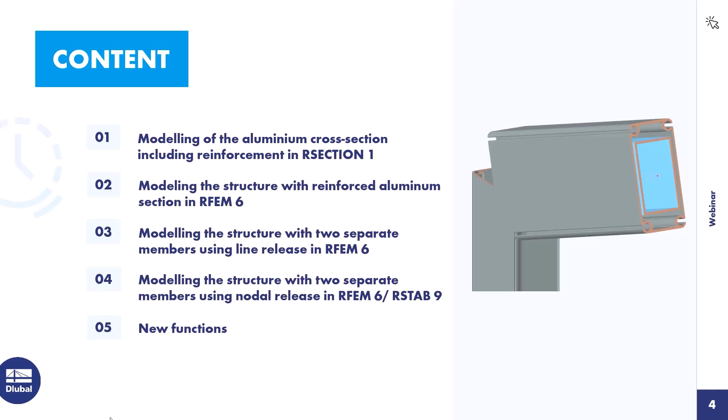This brings me to the first point, the modeling of the aluminum cross-section, including reinforcements, in RSECTION.

The cross-section geometry is available in DXF format, so I can use the import function. The creation of cross-sections based on DXF files was the subject of a previous RSECTION webinar. You can find this webinar on our website or on YouTube. There's also a knowledge base article on this topic on our website.

I start the import process via File, Import, DXF. Then I choose the corresponding DXF file and click on Open. In the import dialog, I select the option Create DXF template for further editing, and then click on OK. Now the lines of the DXF file will be created in RSECTION.

I first create the part using the function Select Boundary. Here I have to define the material. I want to use the material that's already chosen in this box. Then I click on OK, and then I click on the corresponding line. The part is now created.

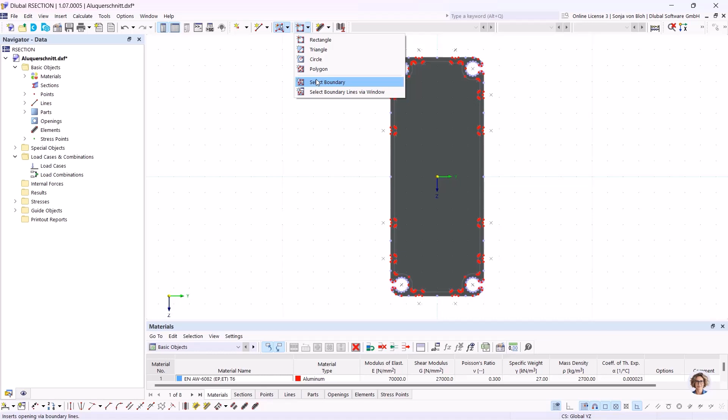Now I have to create the opening. For this, I also select the function available for openings, Select Boundary, and then click on the corresponding line.

I then deactivate the display of the parts and openings to get a better overview. I then create the elements necessary for the classification and calculation of the effective cross-section.

To do this, I only model a quarter of the cross-section, and then create the other parts by mirroring. To do this, I use the Set Centerlines function, which I find here in this part.

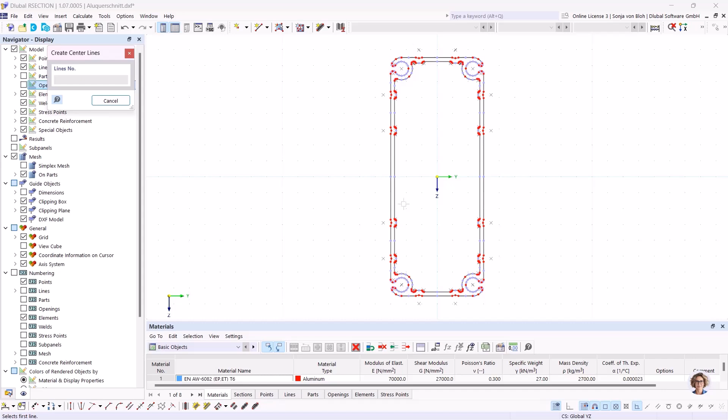All I have to do is click on the two parallel lines, and the center line is then generated automatically. First I create the center lines for the flange, then for the arc, and then for the web.

The center lines then need to be extended. For this, I use the function Extend Graphically. Clicking on the left side of the line to be extended extends it to the left; otherwise it extends to the right until it intersects with the next line. I will extend this line to the left, and I also want to extend the center line of the web on both sides.

Since I only want to model a quarter of the cross-section, I trim the center lines accordingly. To do this, I use a function called To Location, which makes it possible to extend or shorten a line to a specific location.

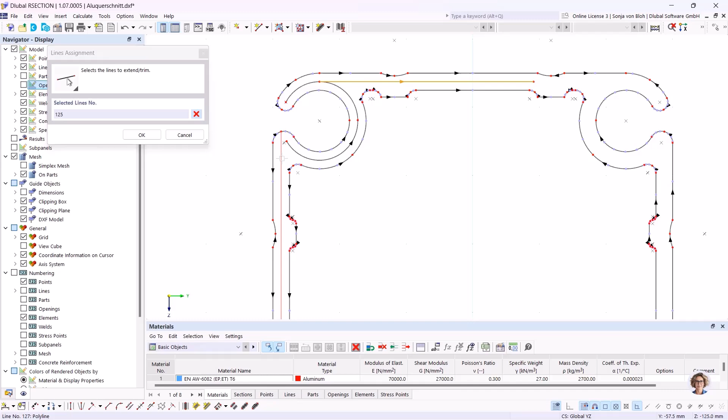I trim the center lines of the flange and the web to the center of the cross-section. To do this, I select these two lines and click on OK. I then have to specify the side of the line to be modified.

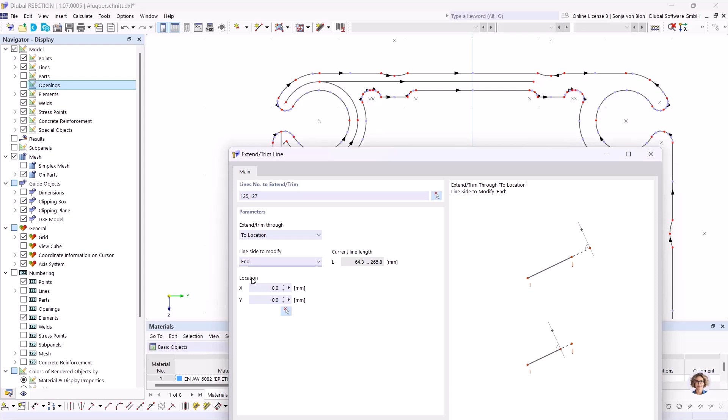The direction of the lines is shown on the working area. I have to shorten the end of the line, so I choose this in this list box. Then I have to define the location in this part here. I choose the 0 point, and then I click on OK.

Then the center line of the arc has to be connected to that of the web, and I make this connection with a straight line. For this, I create a new line and connect it here. I don't need this line here, so I delete it.

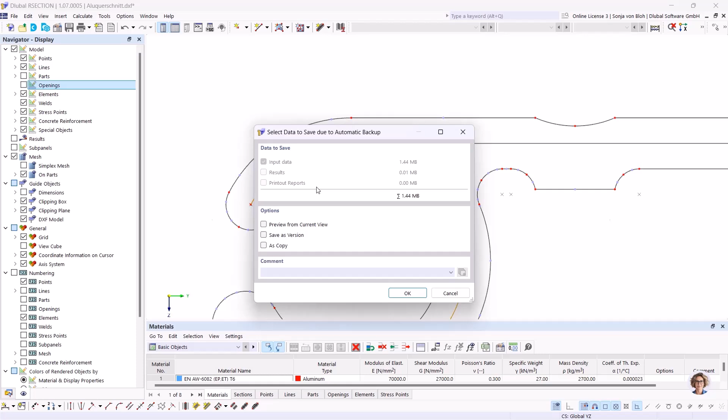Now this line is not divided at this point, but this is necessary because elements are only connected if they share the same node. For this reason, I divide this line at this location using the function connect lines and elements, drawing a window about this part, and now the line is divided at this point.

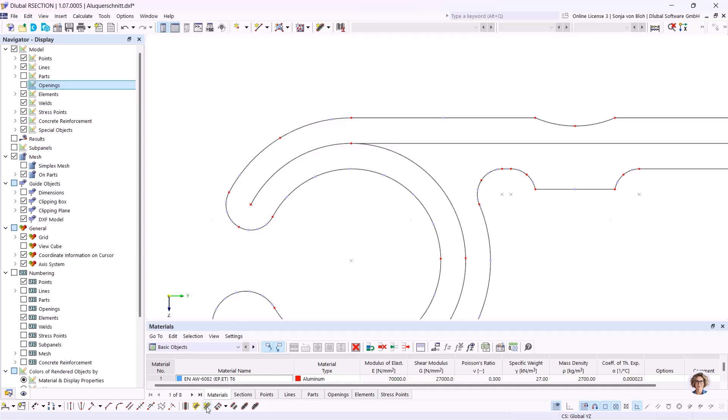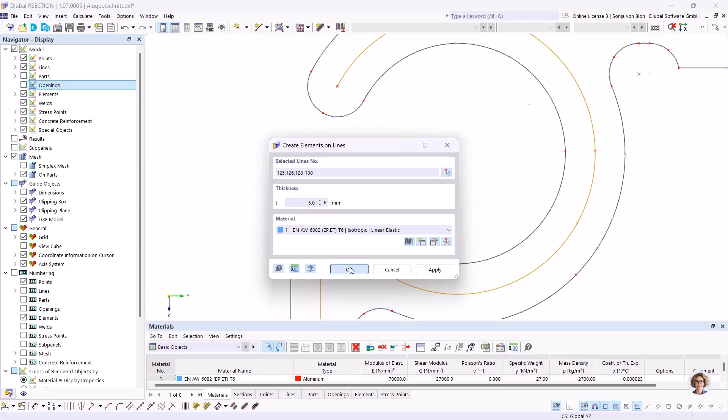I can now create the elements using the Create Elements on Lines function. All I have to do is select the corresponding lines, so I select all the center lines. I click on OK, and then I have to define the thickness of the elements, and here I define 5 millimeters. Now the elements are created.

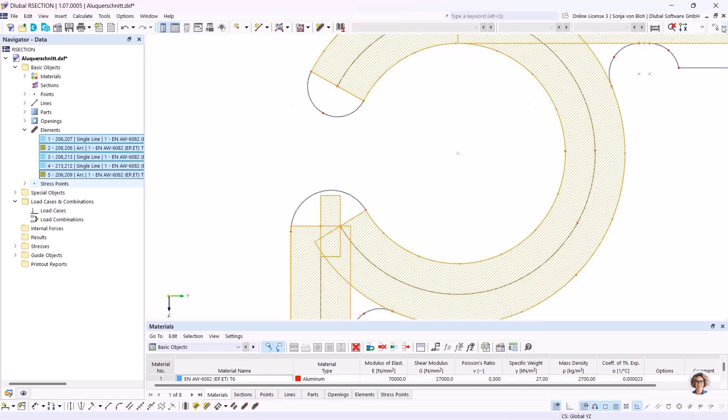I now select all elements here in Navigator Data because I want to mirror them. For this, I choose this function, mirror. I want to create a copy, so I activate this option. Then I have to define the mirroring axis. It's the axis Z, and the point is the 0 point. And I click on OK.

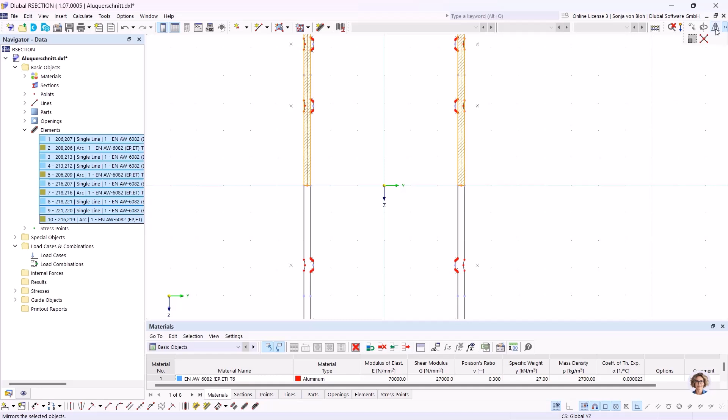Now the right part is created, and I need the part on the bottom. So I select all of my elements and open the dialog mirror copy again, and I change the mirroring axis to axis Y. And then I click on OK.

I then create the reinforcement. This consists of a welded rectangular cross-section made of S235 steel. I import this cross-section from the RSECTION cross-section library.

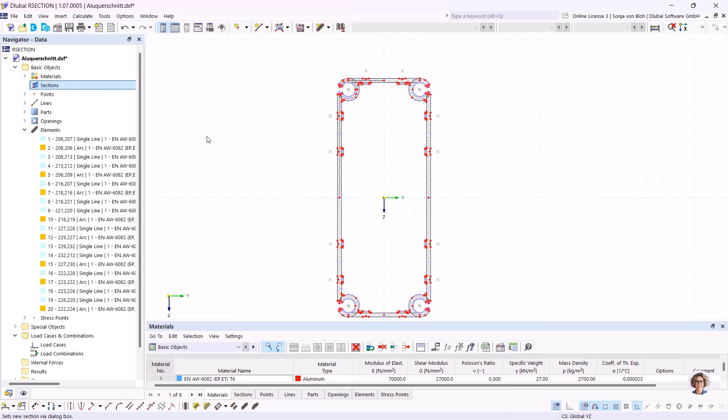To do this, I go to Navigator Data and choose New Section. Then I open the section library and choose the rectangular hollow section. This should be a welded rectangular hollow section, so I choose the manufacturing type welded.

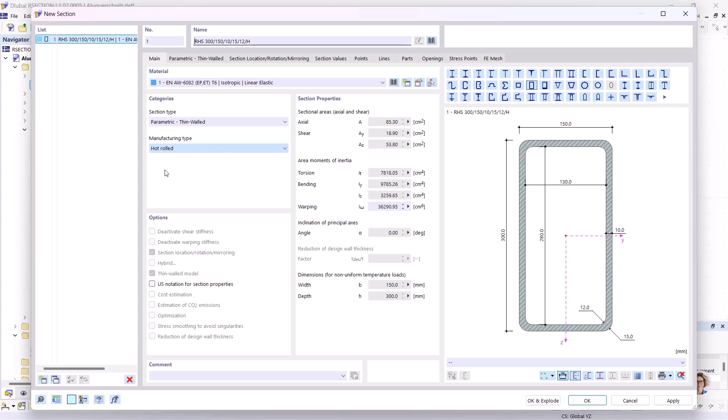I have also to create a new material. I want to use steel S235 for this cross-section, so I create a new material, open the material library and choose S235 from this standard. Click on OK.

OK, and then I have to define the geometry of this cross-section. Height is 230 millimeters, the width is 100 millimeters, and the thickness is 5 millimeters.

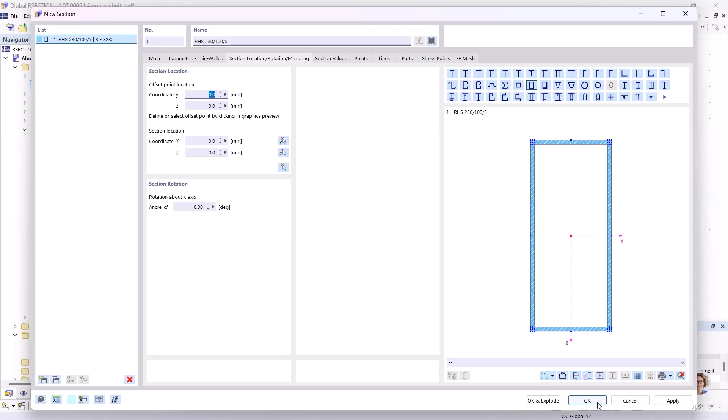In the tab Section Location/Rotation/Mirroring, I select the 0 point as the insertion point, and I click on OK. Only cross sections that are rigidly connected to each other can be imported into RFEM 6 or RSTAB 9. This connection is applied over the entire length of the member.

If the cross sections are not connected to each other, the modeling presented here is not suitable. Two members would then have to be created in RFEM or RSTAB. As I mentioned at the beginning, I will also show this today.

In order to connect the two cross sections, I have to explode the cross section into its individual objects. To do this, I choose this cross section and use this function, explode.

I create the connection between the two cross sections using an element with 0 thickness. To do this, I open this function new element, define a thickness of 0 millimeters, and I have to also define an effective thickness for shear transfer, and this will be 5 millimeters.

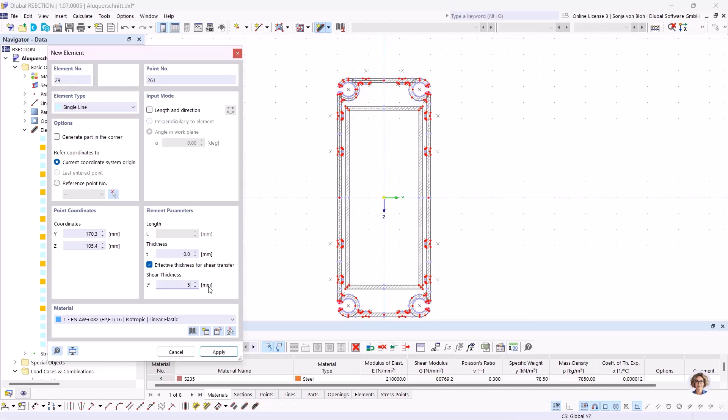Then I create the two elements.

In the base data, I open it here and set the thin-walled analysis method. This is necessary because the connection of the two cross-sections was made using elements with zero thickness. These cannot be taken into account with a finite element analysis. The connection of the two cross-sections would have had to be made using parts.

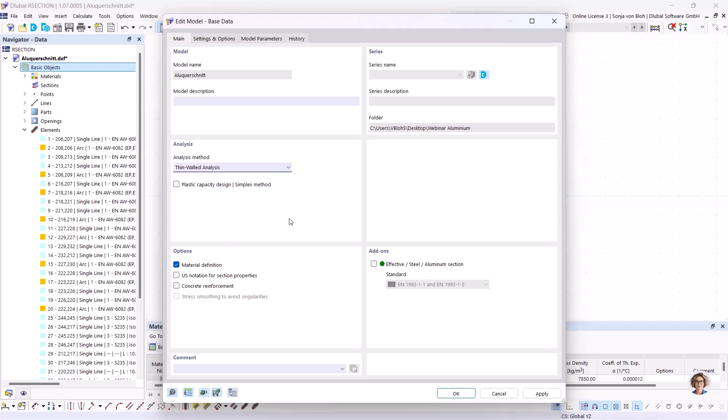It's advisable to start the calculation once in order to find possible modeling errors. Here, no errors will be found, so I save this cross-section now.

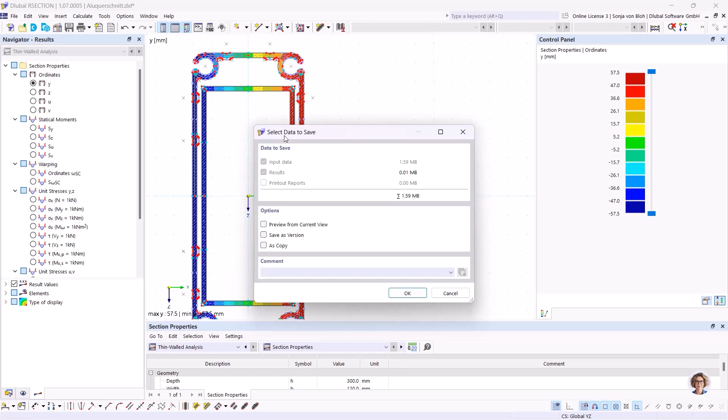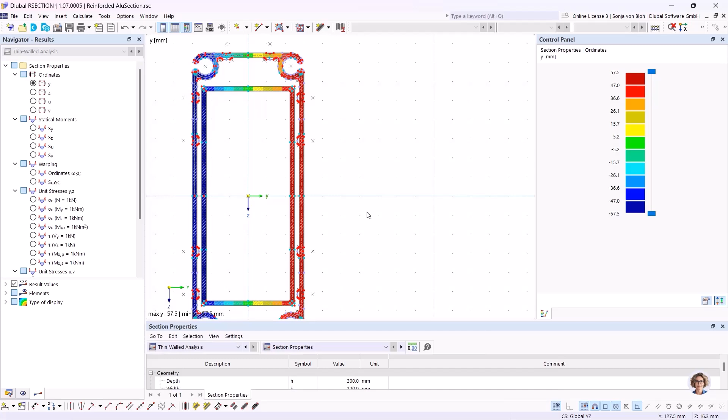I name it here reinforced alu section. Then I can close this cross-section.

I now can model the structure in RFEM. So I open RFEM. Here I have already created a new file.

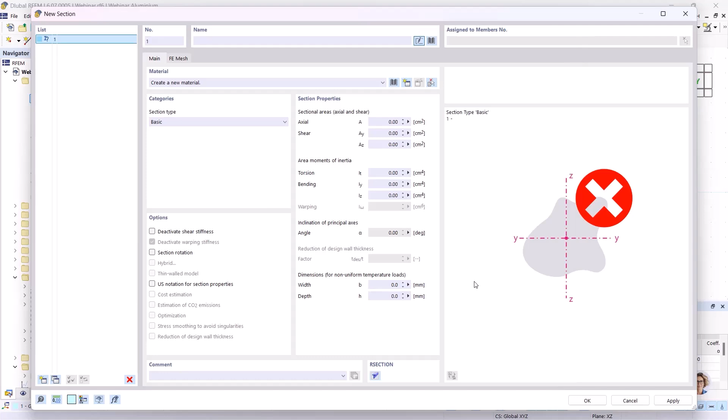I have to import first the aluminum cross-section with the reinforcement that I've just created. To do this, I go to Navigator Data, choose New Section, open the section library from RSECTION, and I choose the reinforced aluminum section.

I still need this cross-section without reinforcements, and for this I want to show you a new function in RFEM or RSTAB. It's now possible to open this cross-section in RSECTION, modify it, and import it again in RFEM or RSTAB.

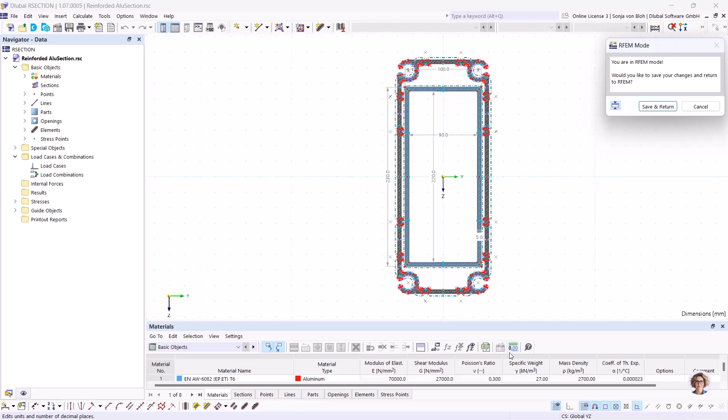To do this, I copy this cross-section and then I open this cross-section in RSECTION. In RSECTION, I then delete the steel cross-section and the connection between the steel cross-section and the aluminum cross-section.

Then I start the calculation again to see if there are any errors. There are no errors, so I can save this cross-section. I want to save this cross-section also on my disk, so I choose here File, Save As.

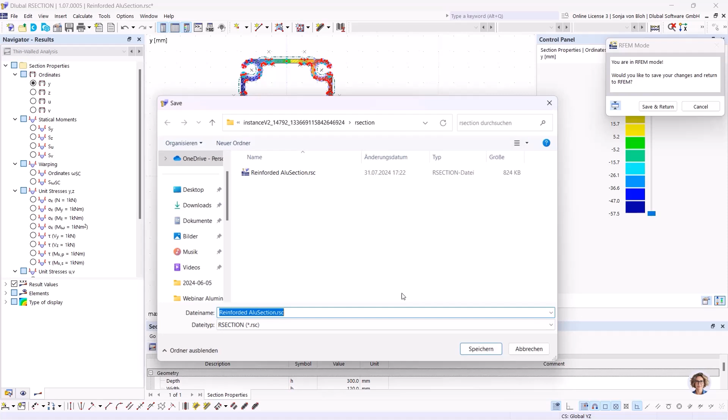I change the name to Alu section, and then I save this section on my disk. Then I save this section.

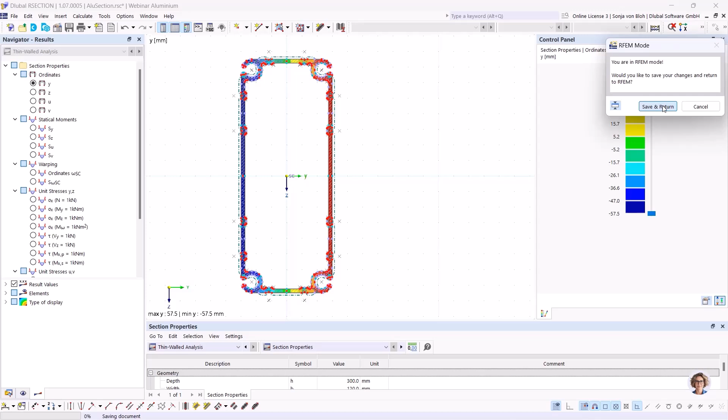I go to Save and Return to RFEM, and by clicking Save and Return, I also apply this change in RFEM. You can see now this cross-section is without this reinforcement, and this cross-section includes this reinforcement.

If I had just clicked Save and Return, only the cross-section would have been changed in RFEM, but the original status of the cross-section would have been left on the hard drive. Then I click here on OK.

I then model the column with the unreinforced aluminum cross-section. I choose New Member, choose the aluminum cross-section, and then I define the column with a height of 6 meters, and I model the beam with a length of 8 meters.

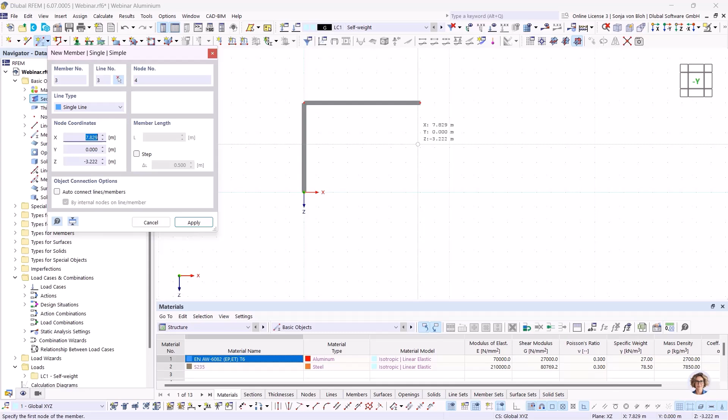The roof pitch is 18 degrees, so I use the function chamfer. I find this function in menu Edit, Manipulation, Chamfer.

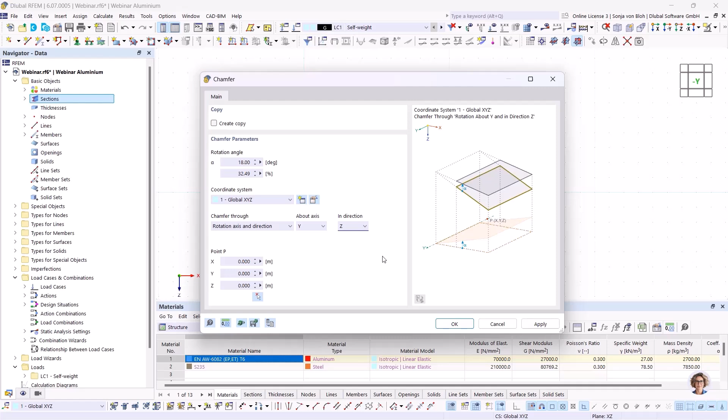Here I have to define the angle, the rotation angle of 18 degrees, and I have to define the rotation axis. This is axis Y, and the rotation direction, this is direction Z. Then I choose the frame corner as the rotation point. Now this beam is rotated by 18 degrees.

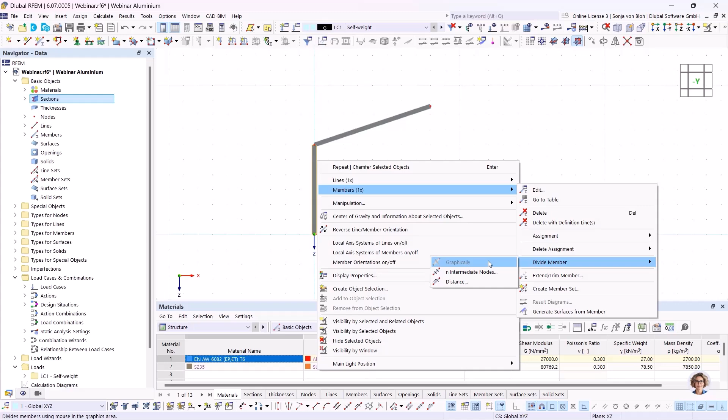The frame corner is reinforced with a steel overlap length of 0.5 meter. I therefore divide the column with this function by distance, and here I define a length of 0.5 meter. Apply this, and I have to do this also for the beam.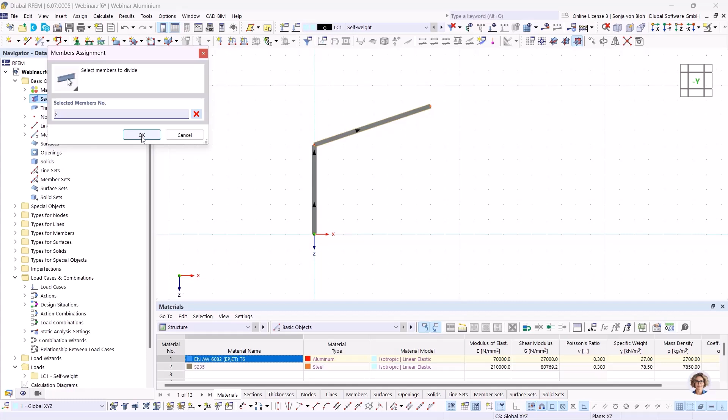But here on member start. Now the column and the beam are divided into 2 parts.

I then define hinged supports at the beginning of the column and the ridge. To do this, I assign a nodal support here, on the column and on the ridge.

Since I want to show different modeling options today, I copy the frame twice. I use the Move Copy function and activate Create Copy. Number of copies is 2, and the displacement vector is 10 meters.

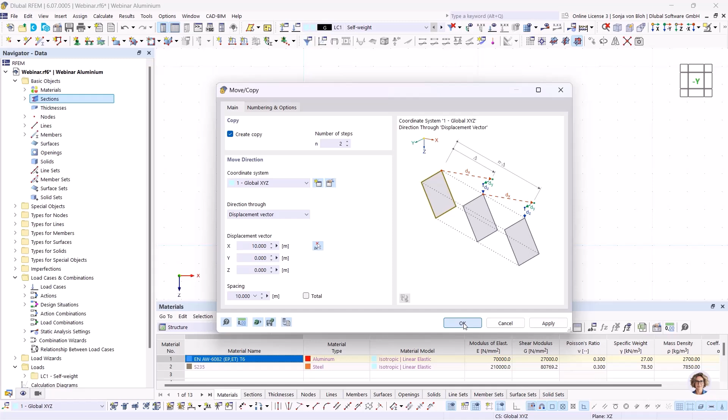First, I will show the modeling of the reinforced frame corner with the aluminum cross-section and reinforcement that I just created in RSECTION. To do this, I only have to change the cross-section in the frame corner. I choose here the 2 members.

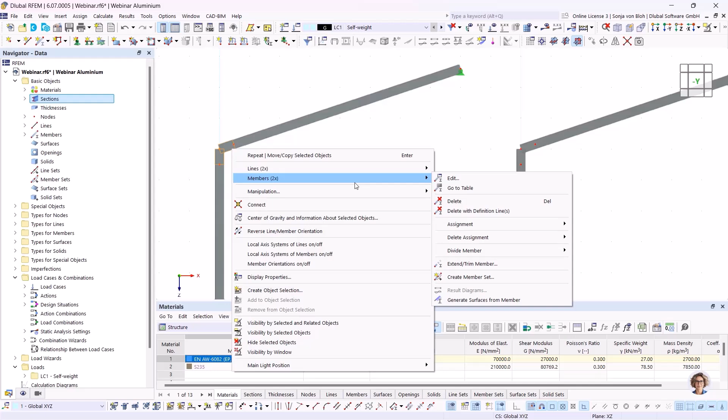Choose Edit, and then I choose here the reinforced aluminum section.

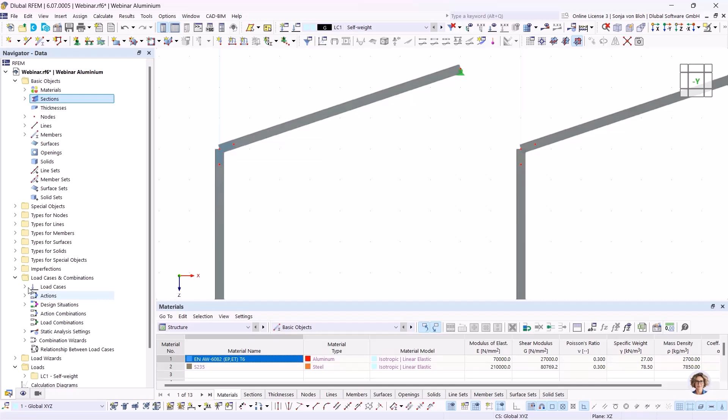Then I have to define the load. I do not want to consider the self-weight, so I deactivate the self-weight in this load case. And then I create the member load, here a load direction global in Z on projected length with a load magnitude of 2.6 kilonewton per meter.

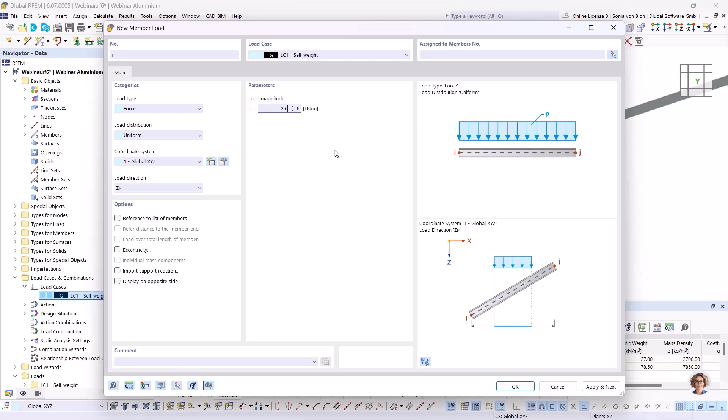And I define it on these two members.

The disadvantage of this modeling is that it's not possible to design cross-sections with different materials in add-on aluminum design or steel design. However, the stresses can be determined in the add-on stress-strain analysis. In addition, I cannot define the coupling conditions between the aluminum and steel cross-sections.

So with this type of modeling, I cannot define that the aluminum cross-section only slides over the steel reinforcement, and thus the steel cross-section only supports bending. The axial force here acts on the entire cross-section. If I start the calculation, I will see this in the internal forces.

However, both mentioned disadvantages can be avoided by modeling two members. First, I would like to show you an option that is only available on RFEM. This is the modeling using line releases.

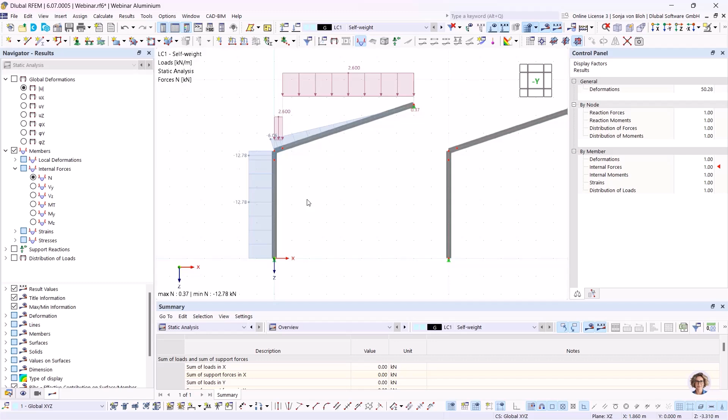A line release allows the model to be decoupled along a line. I would like to show you the principle in my presentation. For this, I go to my presentation. Shown as member 1 on line 1, which is defined by nodes 1 and 2.

First, I have to select the line on which the line release is to be defined. Furthermore, the properties of the line release must be defined. This definition is made in the line release type. The property of the line release are described by a hinge.

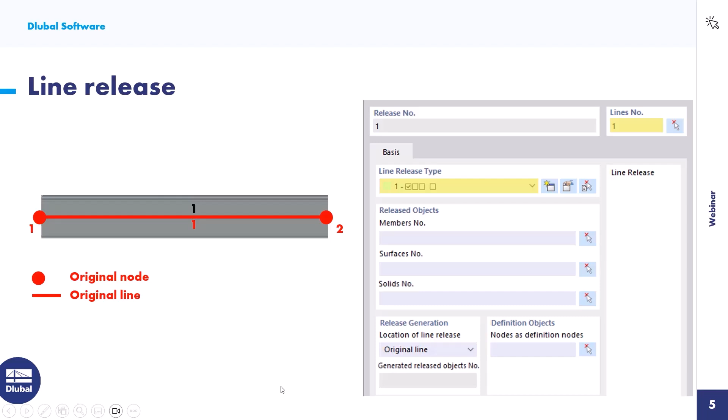The line releases create nodes 3 and 4 as well as line 2, which is defined via these nodes. The generated released objects are output in the release generation part here. The lines are coupled along their length using the hinge condition defined in the line release type. This is indicated by the coupling bars shown on the graphic.

The position of the line hinge can be defined in the section release generation 2. It can be defined on the original line or on the released line. This is defined here on the original line. In this example, this is line 1.

The released line is automatically created with the corresponding nodes as a copy. However, if you want to use one or more existing nodes for the generated line, you can specify the corresponding node numbers in the section definition objects. This affects the results because the displacements at these nodes are not released.

So for example, if you define nodes 1 and 2, as here on this example, as definition nodes, the released line is defined using the original nodes 1 and 2.

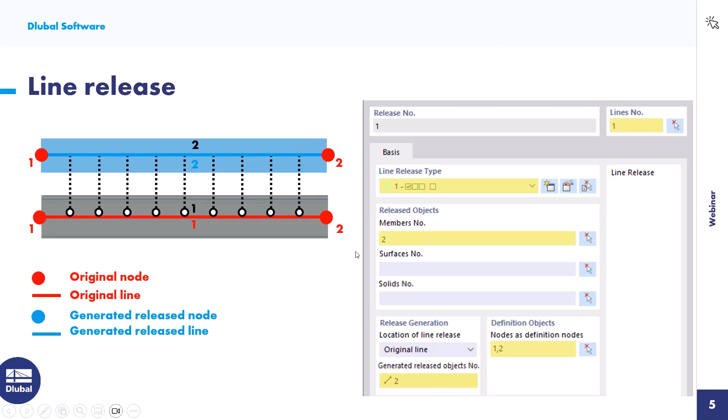I would now like to show you the modeling in RFEM. For this, I go back to RFEM.

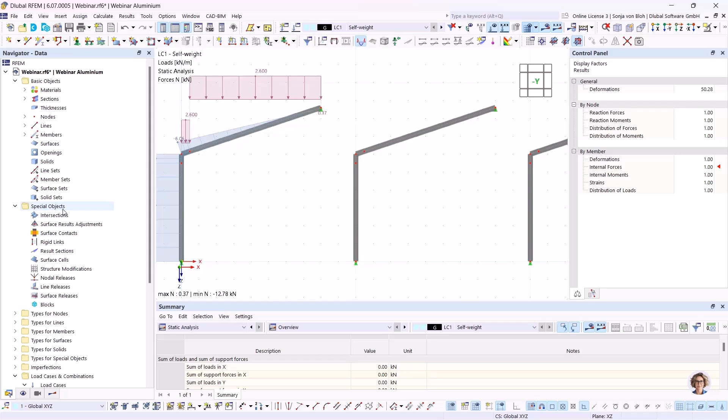First, I create a new line release. I go to Navigator Data and I find the line releases under Special Objects, Line Releases. Here I create a new line release. I then select the corresponding lines. These are lines 7 and 6.

After that, I create a new line release type. The displacement in the X direction should be released here. Click here on OK. And this line release creates line 13 and 14 on the release nodes 16 till 18.

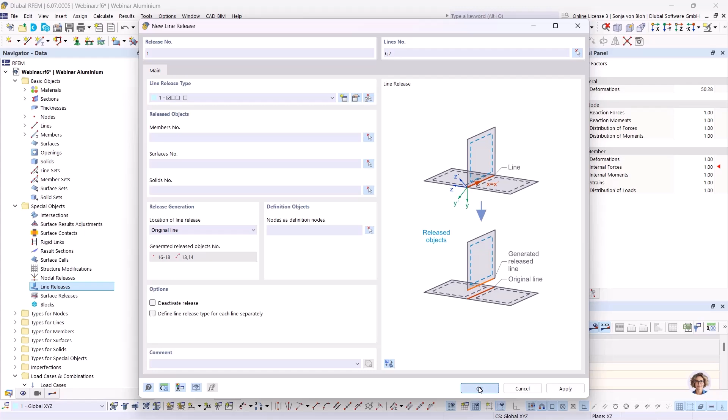On lines 13 and 14, I open it here in the Navigator Data. I now define the reinforcement cross sections. To do this, I choose the two lines, click on Edit, and I apply a member on these lines.

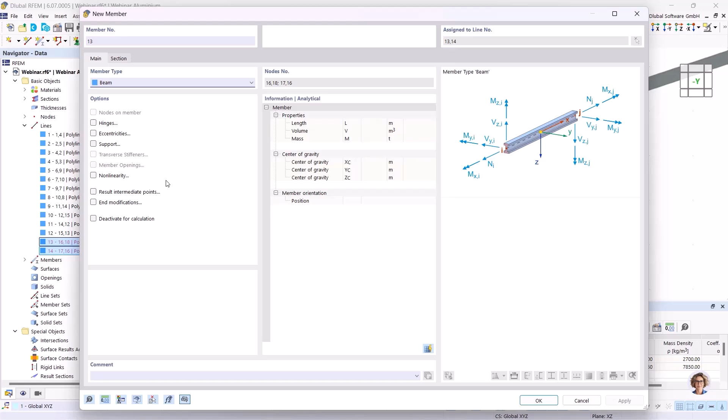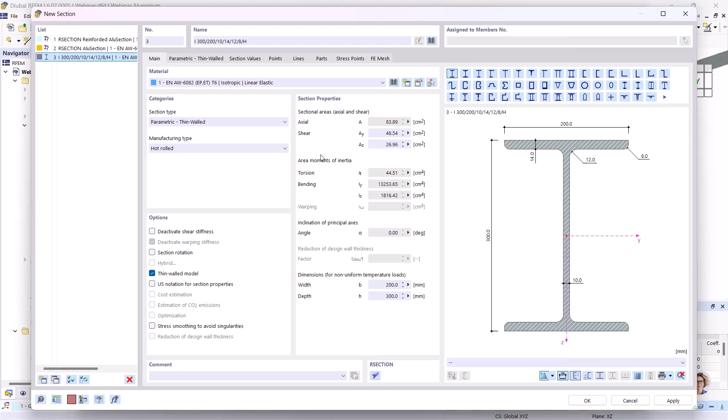And I choose here, or I have to create here a new cross section, and this should be the welded rectangular hollow section. To do this, I open the section library, choose here rectangular hollow section. This section should be welded, so I choose the manufacturing type welded and the material S235.

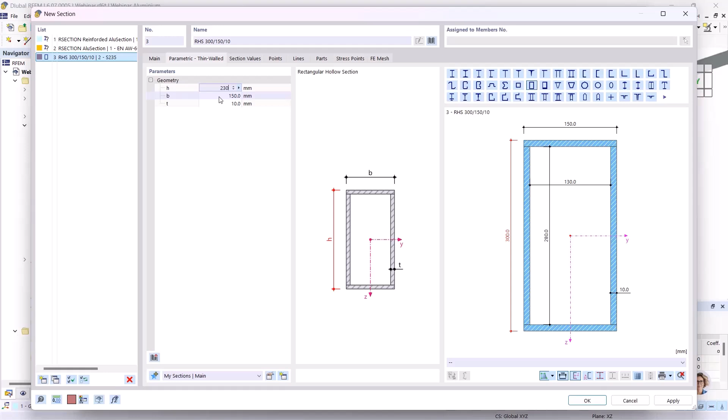Now I have to define the geometry. The height is 230 millimeter and the width is 100 millimeter and the thickness is 5 millimeter. Then I click here on OK.

And now the member is applied on this line. To ensure that the aluminum cross sections are all connected to one another, they must be defined using the original nodes. The steel cross sections must be defined using the released nodes.

I control this using visibilities. For this, I go to the Navigator Views and first I will show here the steel cross sections.

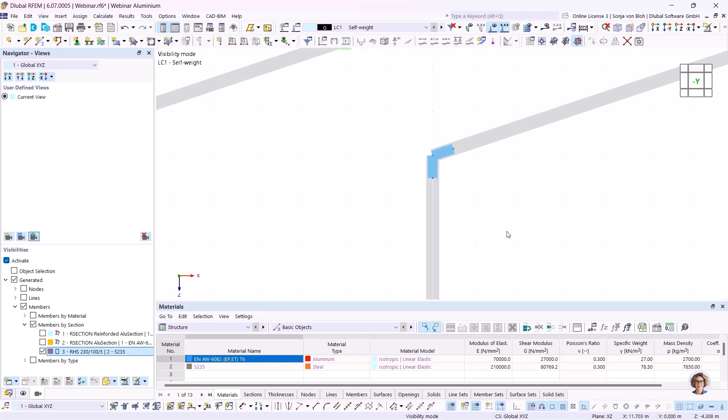These are defined using the release nodes, and the release nodes have here a blue color. If I move the mouse over the node, a reference to the associated line release is also displayed. You can see it here.

Then I only show the aluminum section, and the aluminum sections are only defined using the original nodes, and the original nodes have a red color.

Since the aluminum cross-sections are only slide over the steel reinforcements, I still have to define movement hinges on the aluminum cross-sections in the frame corner here. For comparison purposes with the other structure, I will not show this today.

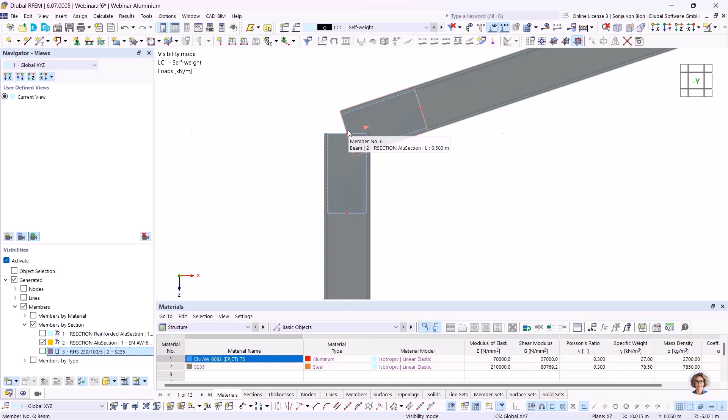I then define the member load of 2.6 kilonewton per meter on the aluminum beams. To do this, I choose here the new member load and define it on these beams. Then I start the calculation.

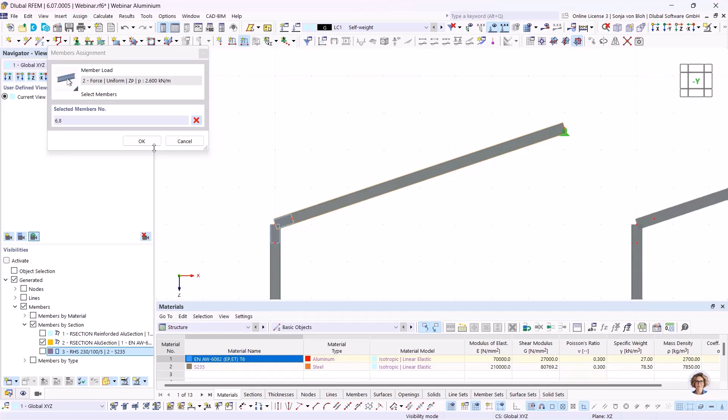I first look at the axial forces, and the axial force is applied only on the aluminum cross-section. If I show here the steel cross-section, I see that no axial force is applied here. This is because we have defined the line release with the release in X direction.

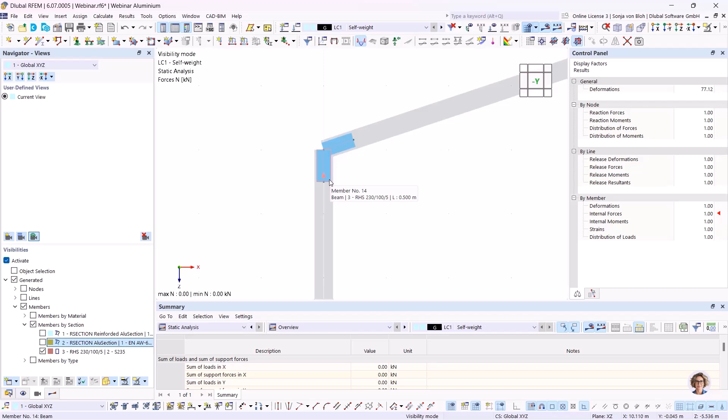Then I show the bending moments here on all cross sections, and then I see here the bending moments are applied to both members via its stiffnesses. The bending moments are applied on the steel cross-section and on the aluminum cross-section.

As already mentioned, line releases are only available in RFEM. However, modeling with two separate members is also possible in RSTAB. Nodal releases are available for this in RSTAB. You can also use nodal releases in RFEM. I would like to show you the principle in my presentation.

Shown is member 1, which is defined via nodes 1 and 2. First, I have to select the nodes at which the release is to be defined. Furthermore, the properties of the nodal release must be defined. This definition is made in the nodal release type. The properties of the releases are described by a hinge.

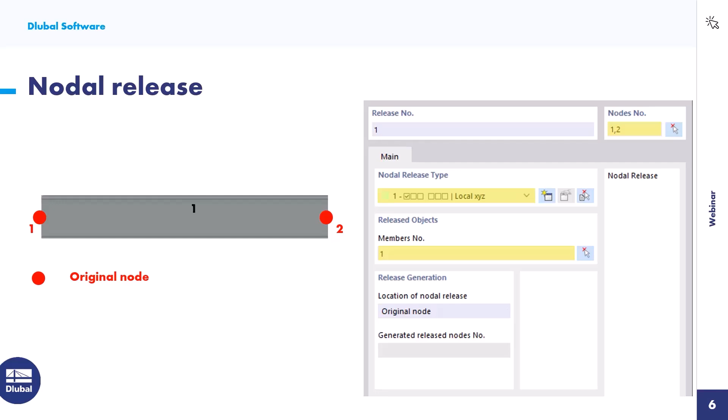The position of the hinge can be defined in the section release generation on the original node or on the released node. I also have to specify the released objects. This is the member number 1 in this case. The nodal release creates the release nodes 3 and 4. The generated released objects are output in the section release generated here. The nodes are coupled via the hinge conditions defined in the nodal release types.

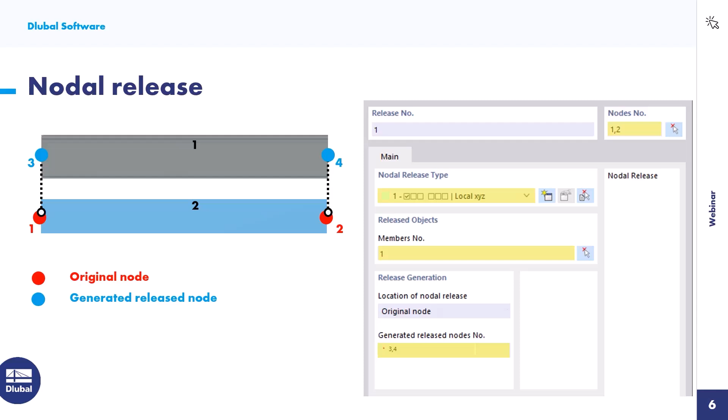You can see it here. Member 1 is now defined between the released nodes 3 and 4. Member 2 can now be defined between nodes 1 and 2. It should be noted that in contrast to line releases, the two members are only connected to each other at nodes 1 and 3, here at this part, and at nodes 2 and 4, but not over the length of the member.

If the coupling conditions are to be applied along the length of the member, in the solution with nodal releases, the two members would have to be divided at small intervals and nodal releases defined at the intermediate nodes.

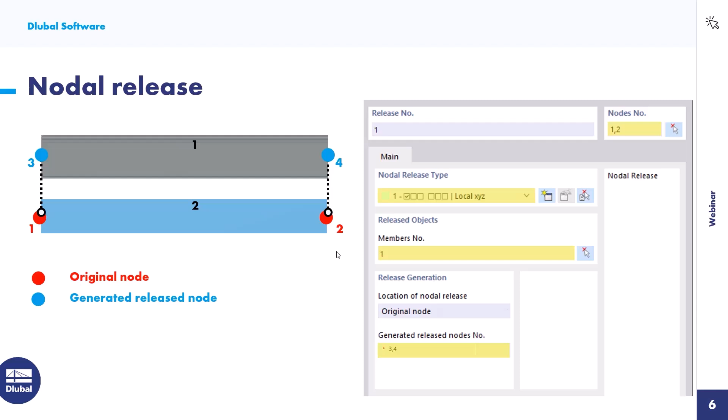I would now like to show you the modeling in RFEM. For this, I open RFEM again. First, I have to create the new nodal release. I go here to the navigator data and I find the nodal releases here under special objects, and I create here a new nodal release.

Then I select the corresponding nodes. These are the nodes 14, 12, and 15. The nodal release type should be defined separately for each node because the reference axes are different. So I activate here this checkbox, define nodal release type for each node separately.

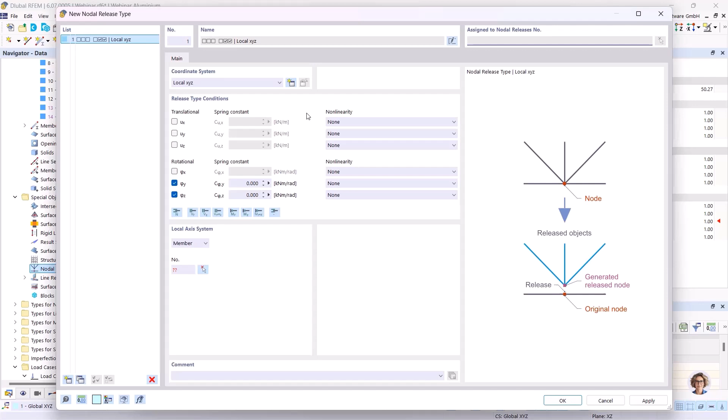Then I go to the tab nodal release type, and here I have to create a new nodal release type for this node 12. And here, once again, the displacement in X direction should be released. Then I have to define the local axis system, and I choose here the local axis system from this member.

This release should be also used for node number 15. And for node number 14, I have to create a new nodal release type. Release is also in X direction, but the member is here, the member number 9.

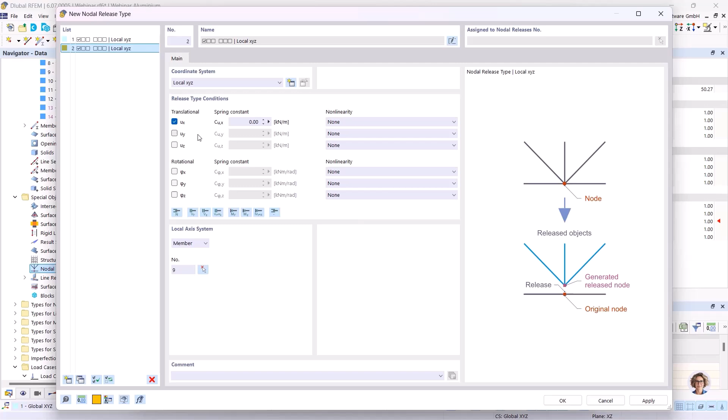Then I have to define the released objects, and these are the objects 11 and 10. The generated release nodes are 19 till 21. Then I click on OK.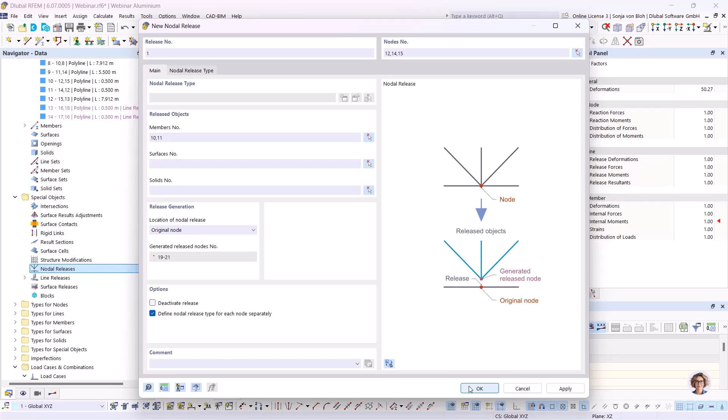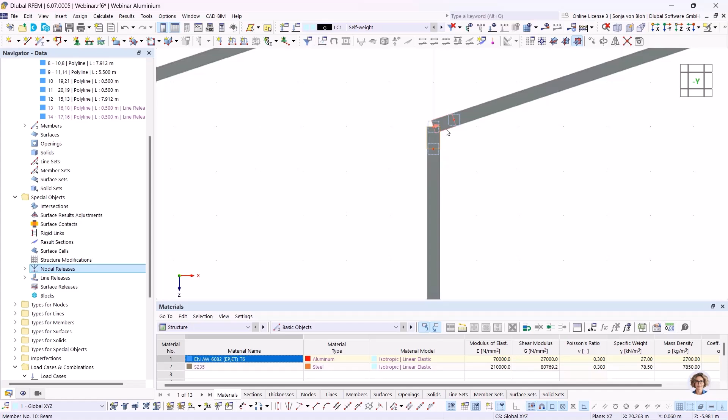The released aluminum members are now defined via the released nodes and no longer via the original nodes. In order for the aluminum cross-section to be connected to one another, they must all be defined via the original nodes. Therefore, I now change the cross-section of the released members. I choose here RHS, the steel cross-section.

I then define the aluminum cross-sections between the original nodes. To do this, I open here a new member, choose here the aluminum cross-section, and then I choose here the original nodes for the definition.

I check this again using the visibility. For this, I open the navigator views and activate the visibility for the steel cross-sections.

The steel cross-sections are defined via the release nodes. Release nodes are colored in blue. I can see it here, and if I move the mouse over the node, I see this is a node created via a nodal release.

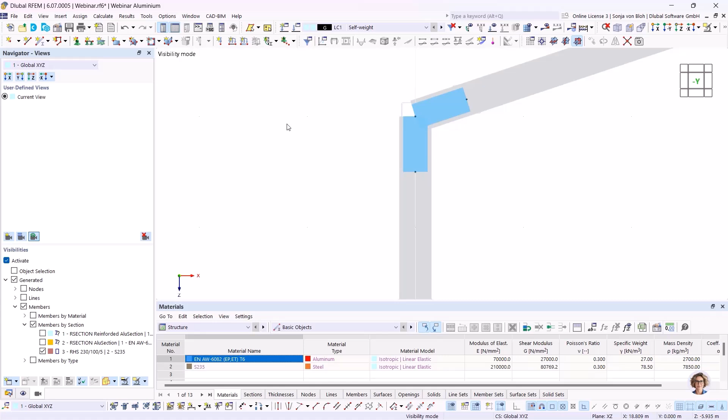Then I show the aluminum cross-sections only, and these are defined via the original nodes. The original nodes have a red color. I can see it here if I move the mouse over the node.

Since the aluminum cross-sections are only slid over the steel reinforcement, I still have to define moment hinges on the aluminum cross-sections at the frame corner. As I mentioned before, for comparison purposes with the other structure, I will not show this today.

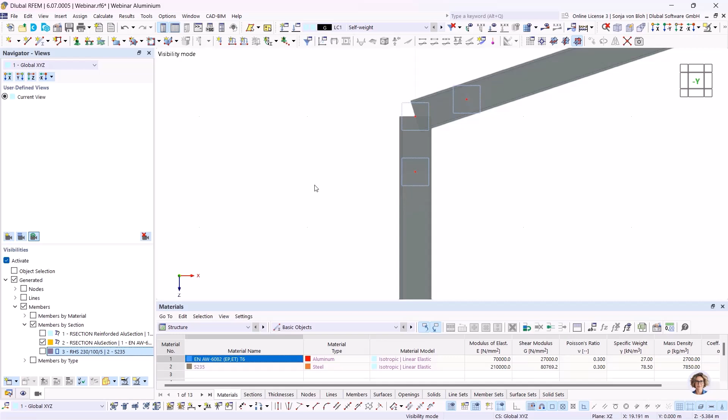I then define the member load on the aluminum beam with the same load magnitude, and then I start the calculation.

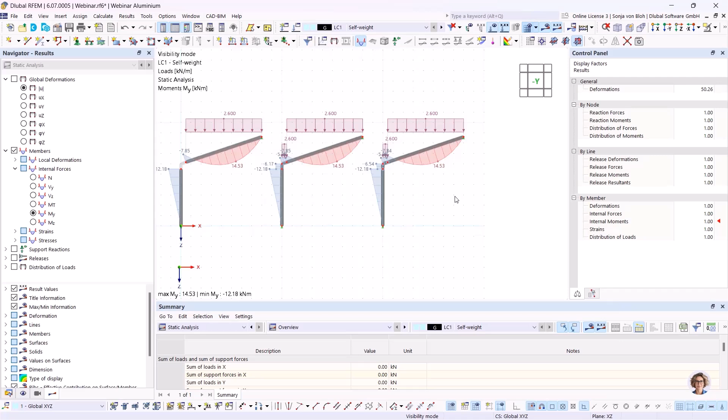I first look at the axial force. Due to the hinge defined in the line release in X direction, the axial force is only transferred via the aluminum cross-section, you can see it here. If I show the steel cross-section, no axial force is applied here.

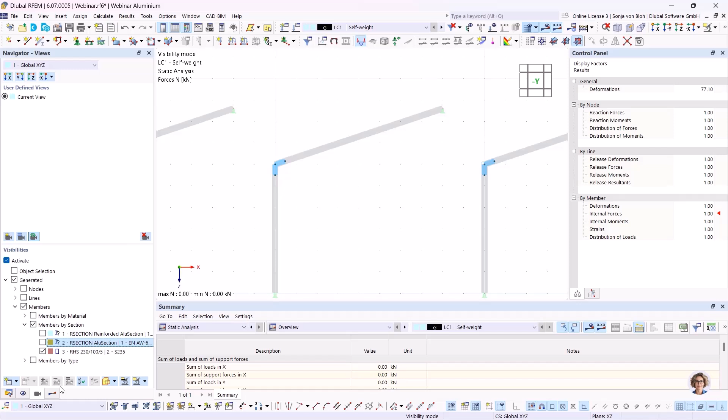The steel cross-section also contributes to bending. I will show you this also. If I show here the bending moments My on the whole cross-section, you see that both members have a bending moment.

This brings me to the last point of today's webinar, the new features. You can now also read results such as the member sag from the dimension. To do this, a linear dimension must be defined on the member.

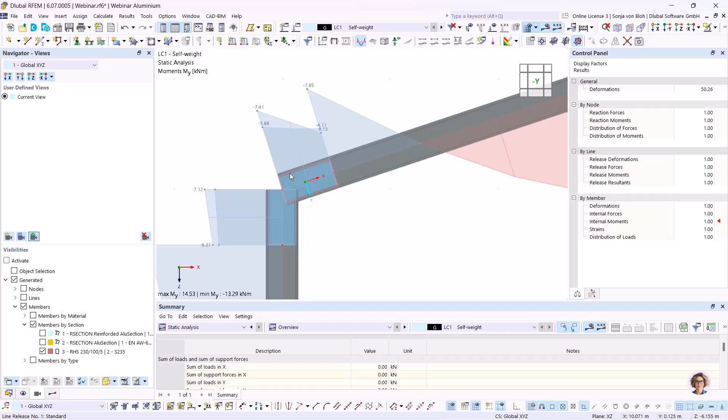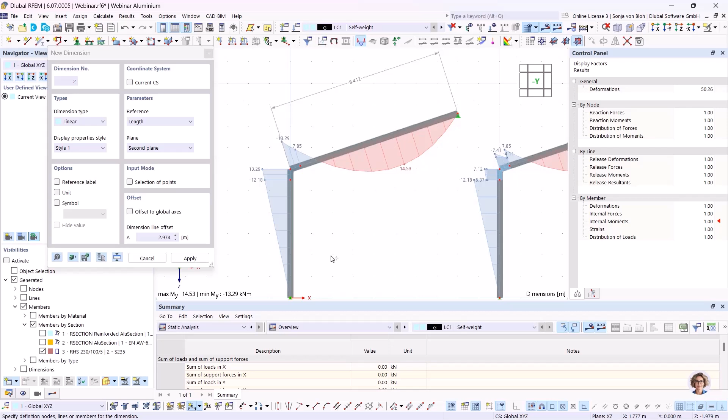I now define a linear dimension on the beam. And to see the results here also, I have to go to the navigator results, and I have to activate under dimension the results on member.

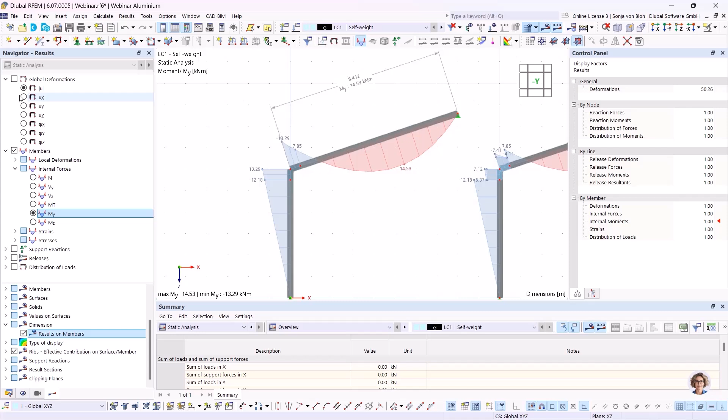If I want to see the deformation, I activate here the global deformation, and I see now the result here on the dimension related to the deformed system. A member sag corresponds to the largest dimension of an imaginary line between the deflected beginning and end of the member section.

The supports are very stiff, so the member sag differs only slightly. Here the member sag is 24.1 millimeter in comparison to the global deformation of 24.2 millimeter.

If I define a dimension between the end of the reinforcement and the end of the beam, the difference will be clearly visible. I do it here, choosing the two nodes.

And you can see here the sag deformation is now 22.5 millimeter in comparison to 24.2 millimeter for this section here.

Another new function allows you to examine the stresses within members using clipping planes. Clipping planes are cutting planes that you can freely place through the model. The area in front or behind this plane is shown transparently in the view.

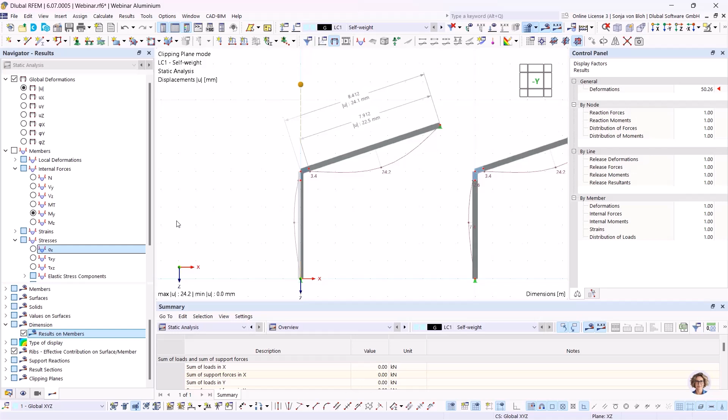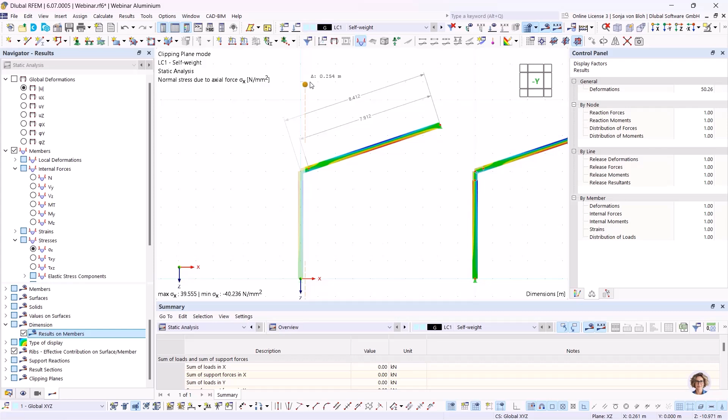Therefore, I choose here the display of the stresses. I can then move the clipping plane to the desired location with the mouse, and I can see now the stresses here in the cross section.

And here in the cross section of the unreinforced part.

This brings me to the end of the webinar. I will now hand the floor back to Andreas.